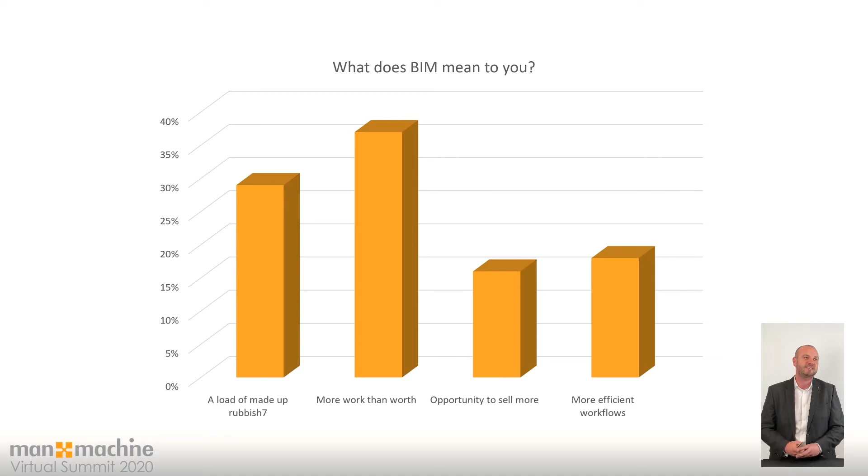Okay, well that was fascinating. We've got the results here. By the look of things, most of you went with it means more work than it's worth, which is quite interesting. In fact, most of you went for the more negative comments towards BIM than the positive ones, but that's very interesting. So we're going to be looking first of all at fundamentally what BIM is.

So the construction world, in my mind, is fundamentally different to the manufacturing world. Trust me, I know we've got both a manufacturing team and an architectural team here at Man & Machine, and they are fundamentally different types of people.

But traditionally, if you are making equipment that is used in the building of any description, you probably as manufacturers adapted your own processes internally probably 10, 20, 30 years ago in order to streamline your businesses. And you've probably been evolving that process through that time.

Now the issue with the construction world is they're only really just getting to grips with digital construction. Now the term BIM, or digital construction as they're preferring to call it these days, it's been around for a fair few years now, and any of you that sell to architects or MEP consultants or structural engineers or even the construction companies themselves...

you know that the requirement on you in terms of data exchange has changed quite a lot in recent years, from predominantly, I guess, a 2D exchange of data to a much more feature and data rich set of deliverables. It's taken the industry a little while to really get to grips with what that actually means.

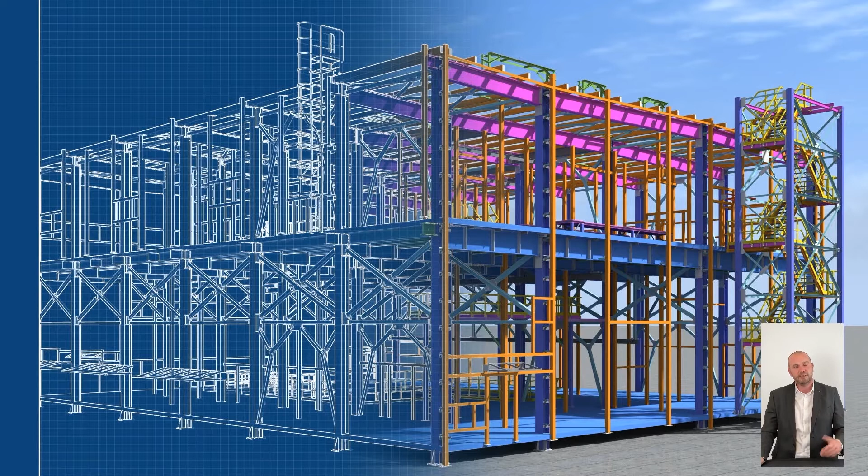This is something that we do quite often, and we can offer our advice. Now, the other thing to note here is that Autodesk products have evolved over recent years, and Robin's going to take you through some of that in a moment. But before he does, I just wanted to introduce you to an example of one of our customers.

So one of our customers is Storm King. Now, Storm King are the largest specialist manufacturer of off-site prefabricated components. When we started working with them a number of years ago, they were already having demands on them to supply LOD4 BIM models to their clients. Their clients typically are the home builders, and they supply prefabricated GRP products, these sorts of canopies over the front of doors, that you see in all sorts of housing estates all over the country.

There was quite a few different product sets, quite a few different products, you can imagine their projects were massive with lots of different content. They were actually considering buying Revit from us. They came to us to ask for Revit, and they wanted us to train an individual in-house to be able to use it, to redraw what they already had created in Inventor, but in a format that their customers needed.

Now, what we actually did was we worked with Storm King on a way to automate the creation of this BIM data, essentially using iLogic and all triggered within the Vault, so that their designers can concentrate on designing good products inside of Inventor. And when Vault gets to a certain stage in the process, it triggers an event to run iLogic, and it recreates the data in a neutral BIM format, pulling the IFC data, all the metadata from Vault, all into the same file in the right location.

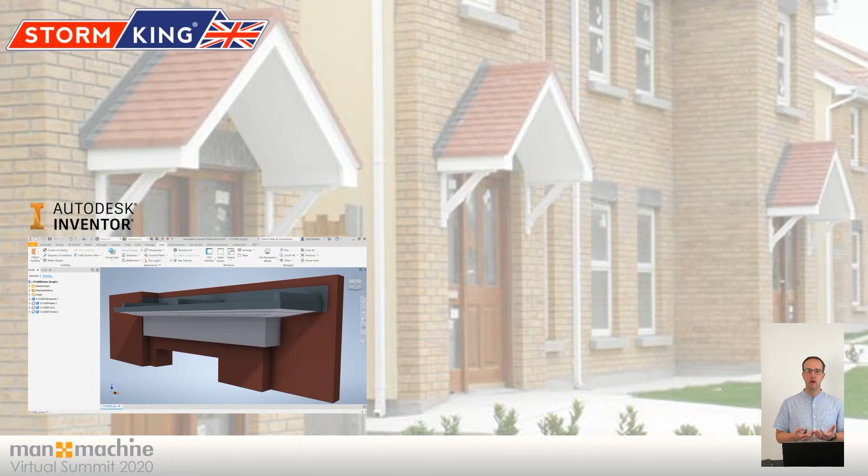So essentially what we're talking about is the fact that as a client, they're a heavy Autodesk Inventor user. And as you can see from the screenshot, a detailed model as you would expect. That model has assemblies, has parts, has fabrication drawings, and enough information there to go and manufacture these components out of GRP. But what they needed to do, as Simon's already alluded to, is produce Autodesk Revit friendly models.

So they were being asked specifically for BIM models. Now that's a little bit more than just a Revit model, as many of you will already know, in that we need to have a good level of detail in that model. I mean, we've got a fabrication model here, so we've got something that is fundamentally too detailed from a BIM perspective. There's just too much information on there from a geometry perspective.

So what we need to look at is extracting enough of that fabrication detail so that we can see a good representation visually, but also tie into the high level of information that we also have against that particular design.

Now, from a building information modeling perspective, the information really is master, and arguably more important than the actual geometry itself. Many times you will see inside a BIM model a very simplistic visualization of a component, even as far as a cube, sphere, or cylinder in some cases, and they are built on with a higher level of information that explains what that component is, what it's used for, defining it in a lot more detail than what can be seen visually, and that's more important.

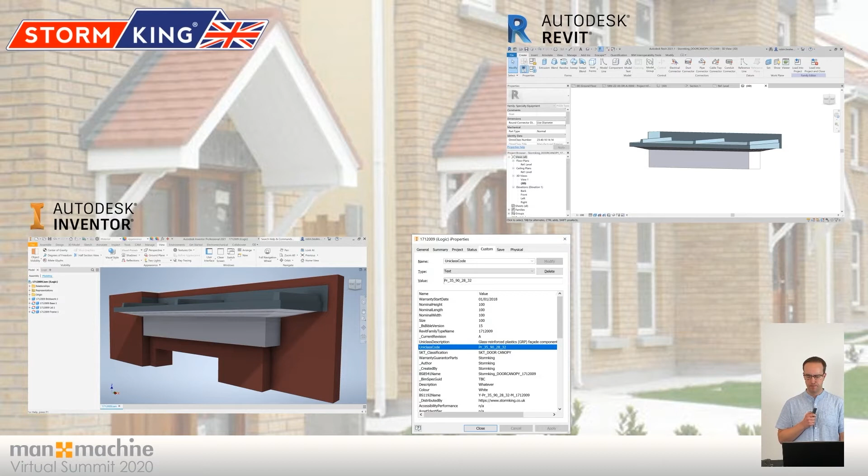So if we could simply take that detailed fabrication design and simplify it, perhaps through the use of shrink wrap, attach all of that metadata to get a BIM content export, then we have the ability to create a Revit family file, an IFC file, or an ADSK component file almost at a press of a button. But we didn't want that to be at a press of a button for Storm King in this case. We didn't want the designer to have to remember to go through that BIM content process inside of Inventor.

They already had a very sophisticated Vault setup with custom API, with the ability to drive information directly from ERP or other systems within the business. So why would we not look at leveraging that integration with some further custom code, custom development, to automate this entire process end to end?

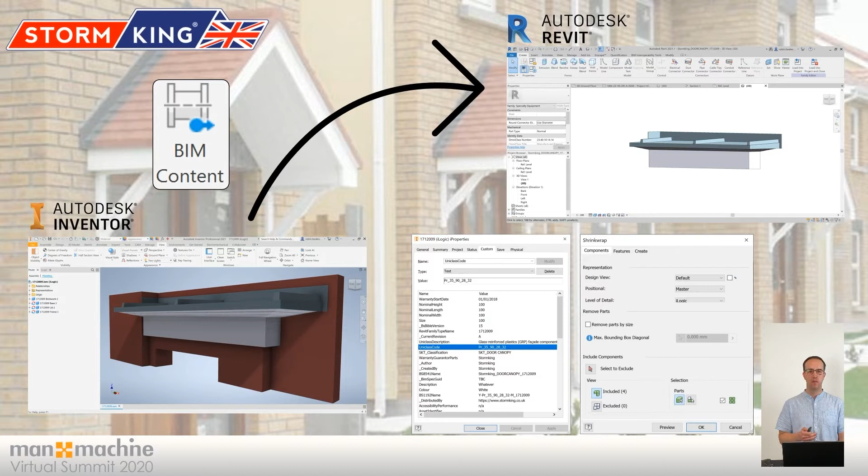So, for example, as part of a workflow or a life cycle inside of that Autodesk Vault system, perhaps when a file gets sent to be released, or set to customer approved, whatever it might be, or even shared with customer, Vault kicks off a custom workflow using Cool Orange Power Jobs, for example, and maybe some clever custom scripting using Windows PowerShell to go and automate the BIM content creation procedure inside of Inventor. That's the process I want to share with you very briefly before we move on.

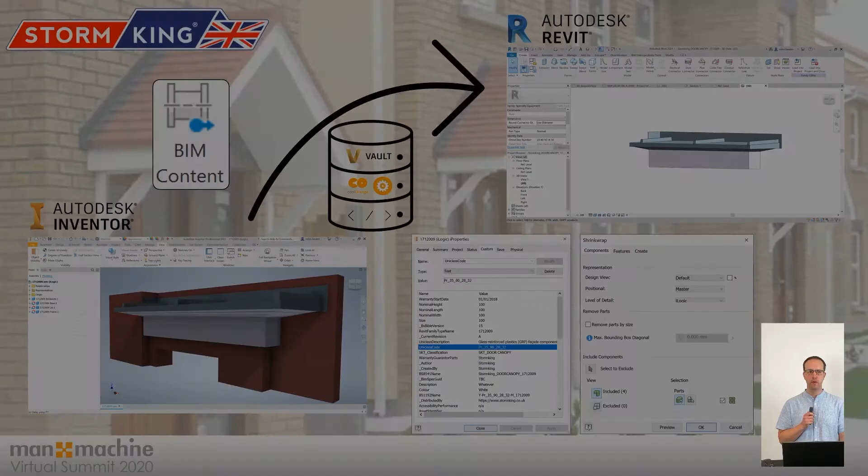So inside of Storm King's Vault, we can see that in this case I kick it off manually, but by selecting an IDW, we have some custom API integration that shows me if BIM files are there. They show me BIM properties that are defined within the file, and they allow me to choose whether something should or shouldn't be included as part of the BIM export.

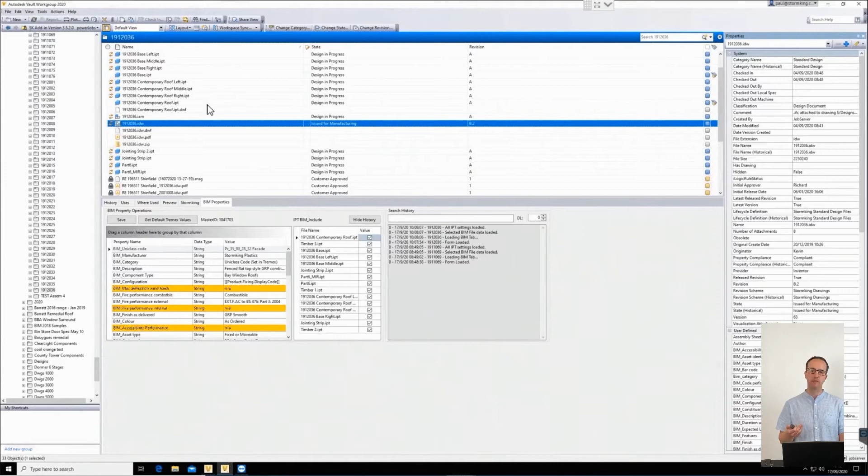Now in this particular example, we chose to generate these files manually because we didn't actually want to go through and kick off a workflow on this particular live design file. But what you can see happens is it kicks off a job inside of Job Processor.

And if I just give this a couple of seconds, what this does is it will automatically go ahead and create a shrink wrap. So it simplifies that main assembly file, and that is closely followed by both a Revit file, RFA family, an IFC Industry Foundation Class file, and an ADSK file.

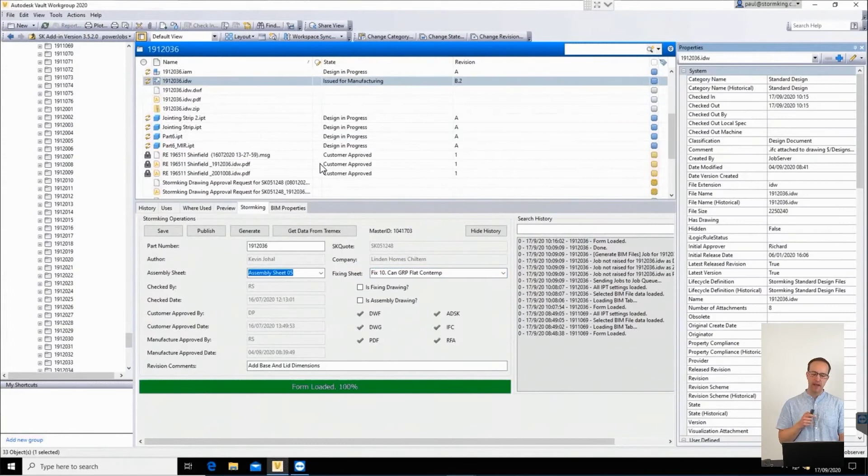And once they're created, they are checked back in and up-revved, up-versioned as necessary into their Autodesk Vault system, all automatically based on those series of automated rules.

That process means that they can just carry on with their design work and pushing their life cycles through Autodesk Vault, and it will automatically create BIM content when they need it. It will appear in Vault. They can then share it with the customer as necessary.

That's a great workflow for me, and it's things like that that we really strive to help our customers with. Not just solving a problem, but actually embedding it with an existing solution and some existing workflows, which means that they haven't got to go through a change management process. They've got something that's embedded with the way that they work, which from my perspective is great.

I want to share how Inventor as a product has really matured in BIM interoperability over the last year or so, specifically with its AnyCAD functionality. AnyCAD has been inside Autodesk Inventor for a number of years, offering interoperability with CATIA, SolidWorks, step files, and other products outside the Autodesk ecosystem, as well as Fusion 360, AutoCAD, older Inventor files, and now Autodesk Revit has had an upgrade in that AnyCAD functionality.

We've been able to bring Revit files into Inventor for a number of years, and it's always worked pretty well. But with 2021, we now have the ability to drive some nice interoperability between Inventor and Revit, which I'm going to show you in a few moments.

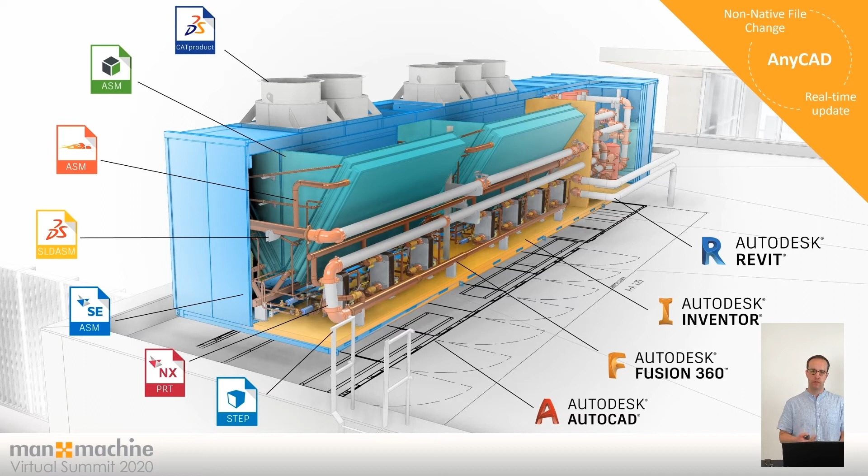So what I'm going to show you is a workflow between Inventor and Revit. Simple as that. But the bigger picture is actually a much wider workflow, one that can communicate all the way from Revit to Inventor via BIM 360 docs and Autodesk Vault. Autodesk Vault and BIM 360 docs have been able to talk to each other for a number of years now.

We're limited on time today with this virtual session, so just think about the story behind what you're seeing. Whilst you're just seeing Inventor to Revit interoperability, imagine that as a manufacturing designer, you're checking in and out of Autodesk Vault. In the background, that Vault could be downloading the latest architectural file from BIM 360 and putting it live, ready for you to link inside Autodesk Inventor.

It might be that you want to share your latest Inventor design, or share an IFC file from that design, to the architect or specialist designer. All you have to do is check it into Vault, change the status, and that could be automatically synchronized up to BIM 360 so the architect, specialist designer, or contractor has instant access as soon as it's readily available.

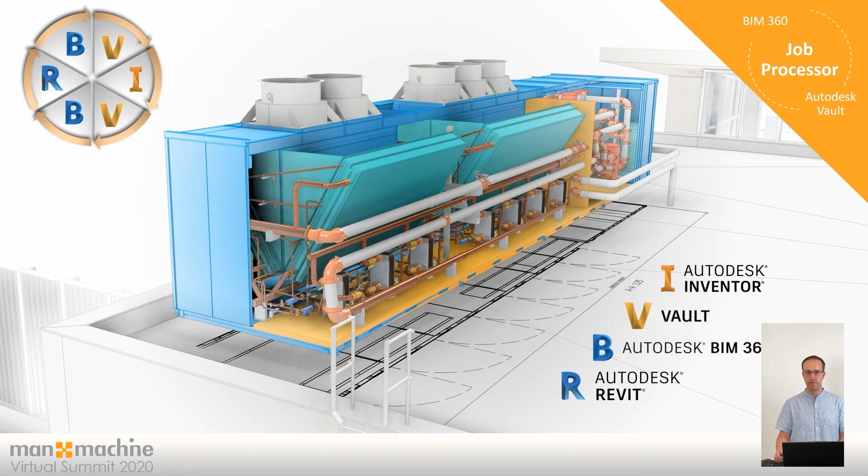Okay, so we've just jumped into Revit 2021, specifically point one in this demo. The first thing I want to do is explain the difference between a Revit family and a Revit project, because that's important for you to understand throughout this short demonstration.

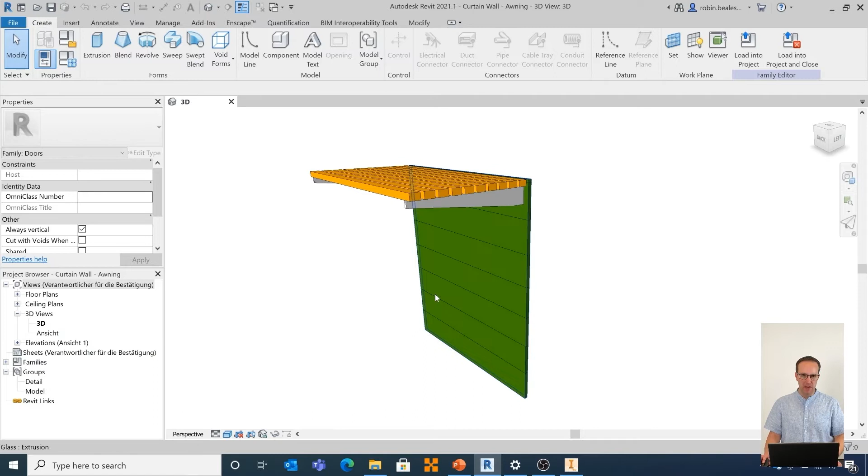We're going to start off with a Revit family file. From our perspective this is kind of an assembly, if you like, though you could argue it's a part since it doesn't quite have the intelligence to know there's a BOM in there. But we have different components or features, so in this case some extrusions and maybe some lofts in there. But there's no fabrication detail.

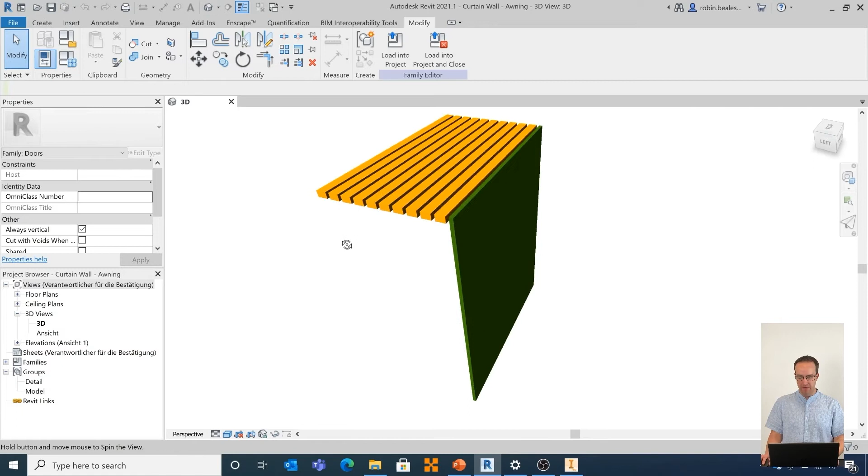You don't get that understanding of how many components, and how many iterations or instances of those components, are there. But what we do have is a good level of information against those, a good property level or understanding of that property level inside of Revit.

Now those Revit families, RFA files, are typically placed into an RVT file, which is a Revit project. Those Revit projects are typically much bigger than an individual component, so an entire building, for example, whether that's an architectural design, a mechanical, electrical, plumbing design, or a structural design.

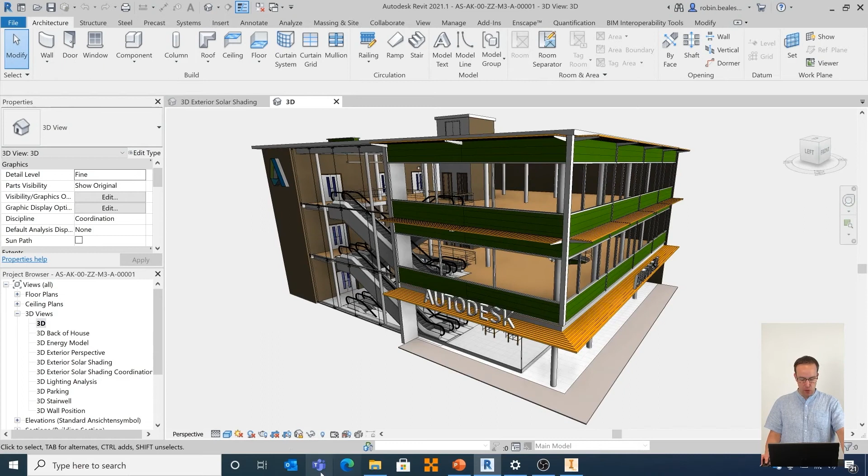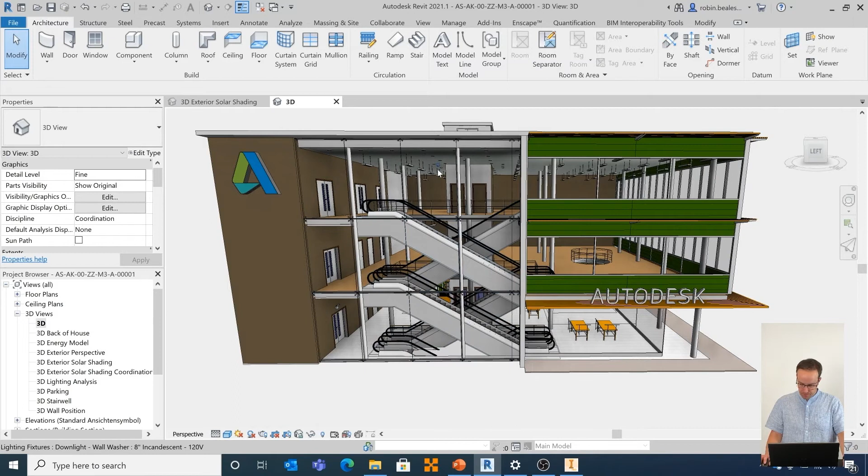Revit supports all of those. In this case, we're looking at a simple architectural design of a building. If I jump into my main 3D view, we can see that we've got a fairly detailed model. It's not to the nth degree detailed, but we've got a nice looking model with exterior building components, walls, windows, doors, some facade elements, curtain walling, panels, escalators, slabs, lighting, and columns. So we have a building.

Now, because we don't need that breadth of information in Inventor for what we're going to do today, I've just created a simple view called 3D Exterior Solar Shading in Revit, with a filter on there to turn off the stuff that I don't need in Inventor. So I've created a filtered view in Revit that I'm going to use to import into Inventor.

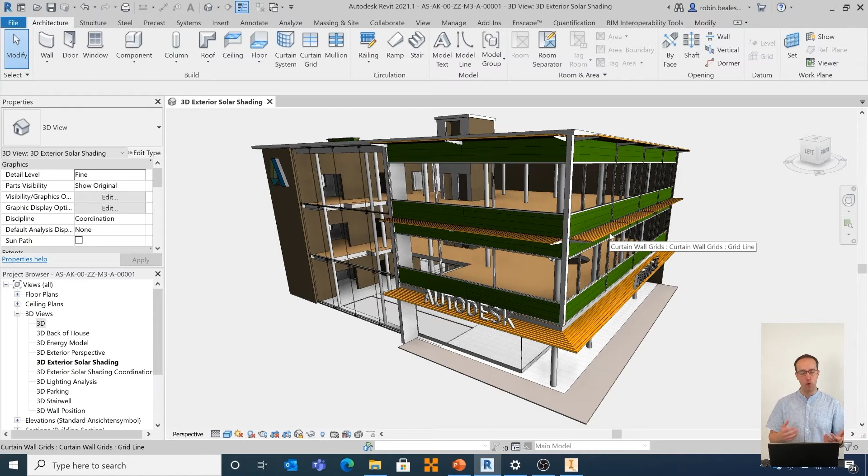Maybe the spec of this particular project is that we want to create the facade that the architect has laid out. So we've got those Revit families we saw, placed around this building. What I want to do is import that into Inventor, reuse that initial thought or design, and then develop it into something that can be manufactured, that we can fabricate and put together, and deliver the right size, shape, and fitting to go on that building.

So I'm just going to leave Revit open, jump into Inventor, and go through a couple of processes first. Majority of you on this session are Inventor users in some way, shape or form. Just to reiterate one thing we went through earlier, what I have in Inventor is intelligent component design.

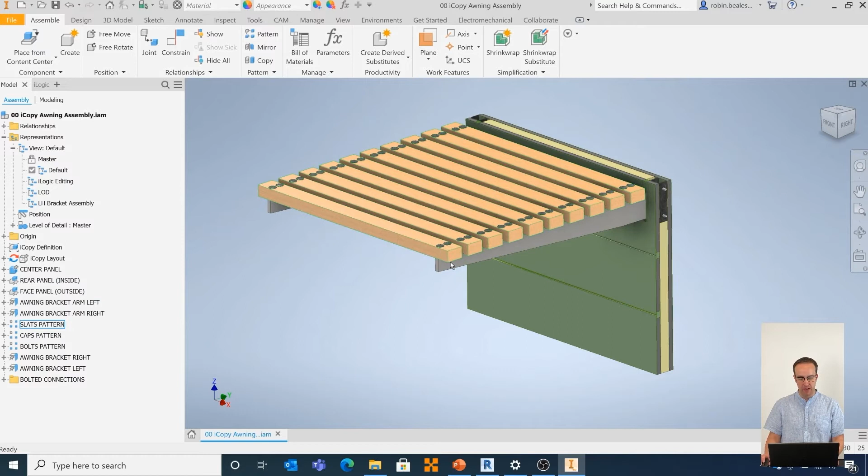If I look at the same facade that we just saw inside of Revit, we have something far more detailed. We've still got the slats on the top, but those slats are fastened to these sheet metal brackets, which are in turn fixed to the main material on the facade with some fasteners. We have insulation material in there, and typically something that is a lot more detailed and manufacturable from that perspective.

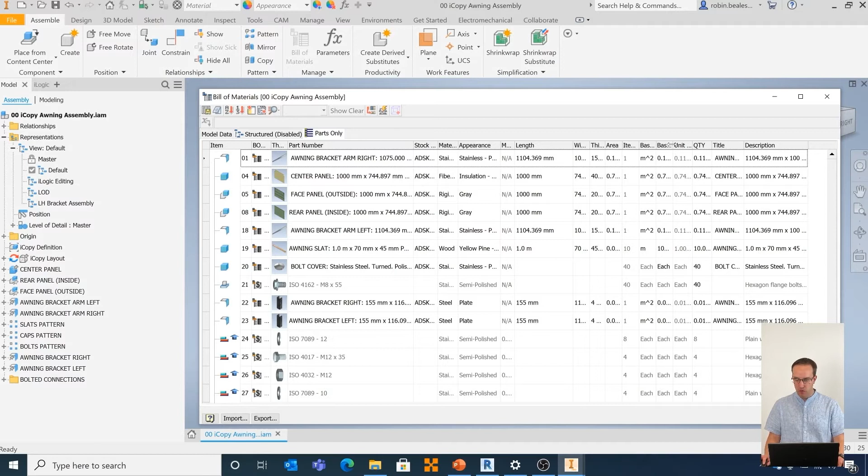In Revit we had a very simple component with a few extrusions, and in Inventor here we have 130 different components, 25 of which are unique, which means I have a fabrication bill of materials I can look at from a model data perspective or parts information, showing me lengths, widths, base quantities, areas, different materials, and so on.

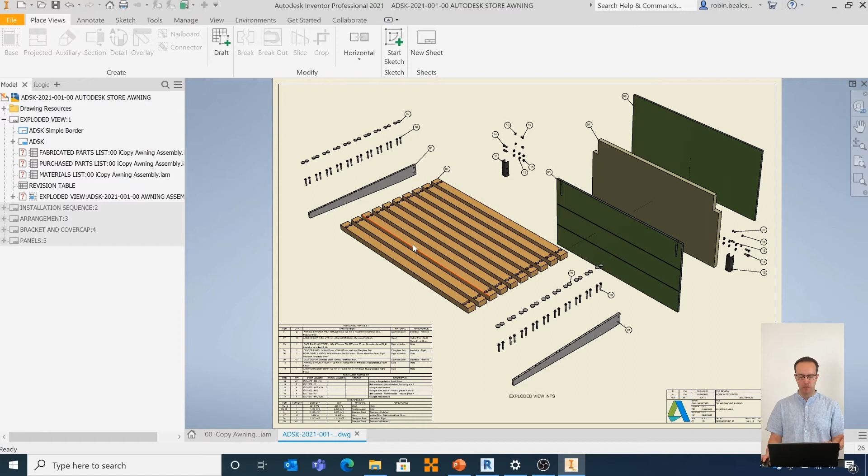It also means that for every single one of these components, I have a drawing, whether that's an IDW or a DWG, something that is updated live from those assembly files or part files. So whether it's a GA like this with an exploded view and a parts list, or a specific view of one of these individual components, I have a fabrication model, a manufacturer's model, with the different drawings and GAs that link with it.

And to remind you from the sessions we had this morning, we also have things like iLogic. I'm not going to go through all of this again - if you missed the session on iLogic this morning, be sure to go catch up on our YouTube channel. The joys of live demos.

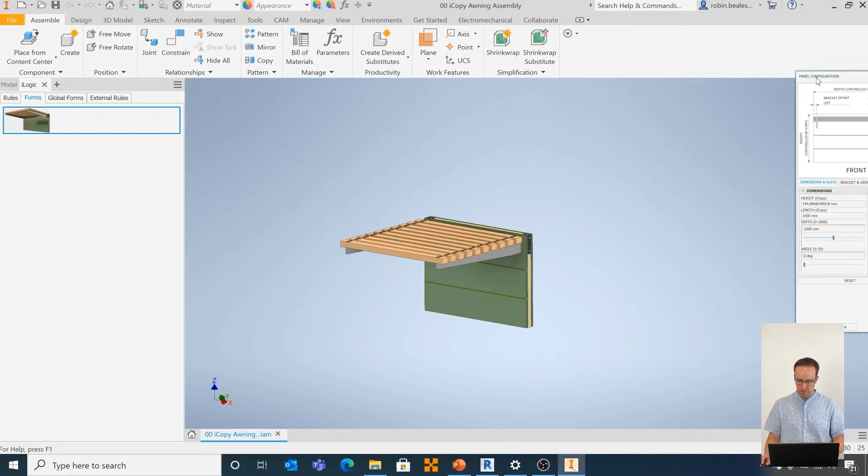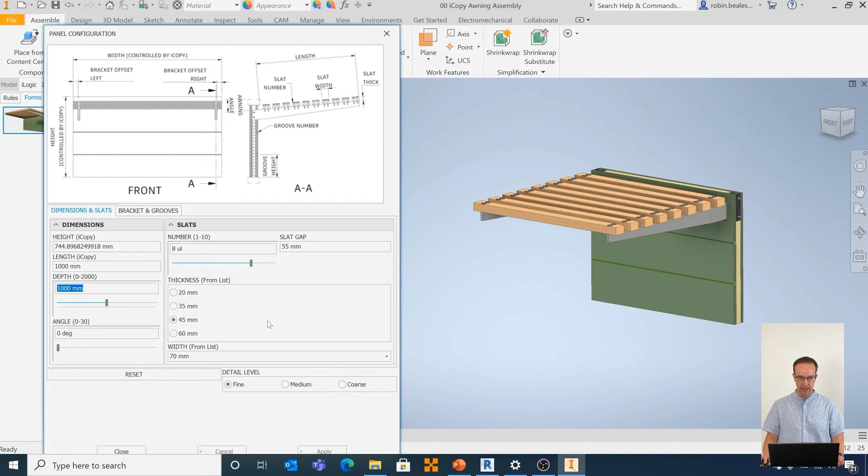But as you saw earlier this morning, with this particular component we've got an iLogic form, so we can come in and change the number of slats. We can change the height, change the width, and the model updates for you automatically. I'm not going to go through that in the same detail as this morning, but essentially we've taken that spec from the customer and detailed it, defined it, and got something we're now ready to put on the side of the building and start collaborating with that architect. And that's what I'm going to do now.

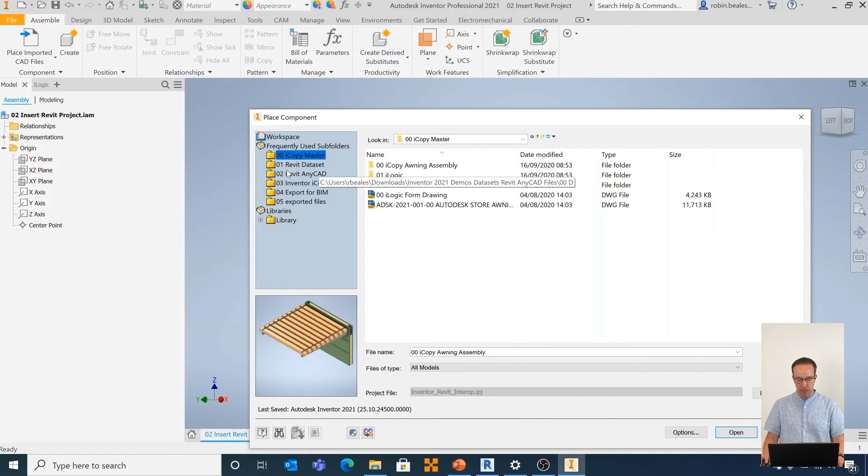I'm going to open up a blank assembly template ready to receive that Revit file. I'll jump to the drop down and say I want to place a CAD file, specifically AnyCAD component. From there, I'm given a whole raft of different options, but I'll use my frequently used subfolders to jump to my Revit dataset and choose to import this Revit file. I'll say open.

It would take a couple of seconds the first time, and depending on how big that Revit file is, it might take a little longer or a little less time to load. I'm running on a pretty good spec laptop, so it loads pretty quickly, but it's not the biggest or most complex file in the world.

When importing, we can choose to import as a reference, which keeps a live link between the Revit file and the Inventor file we'll use today. It's fantastic, but you might not want that—maybe you want a nail in the ground at the point you downloaded it, so you'd choose to convert the model instead. In this case, let's reference it.

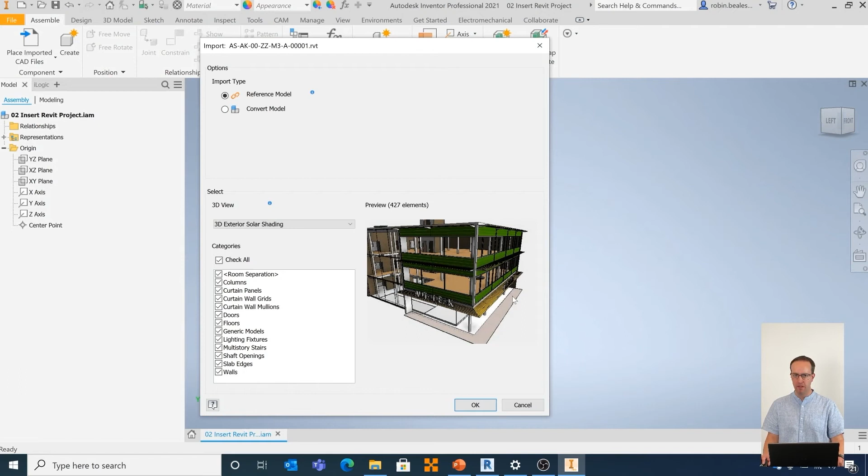Let's use that 3D view we built in Revit, the 3D exterior solar shading view. I'm going to be lazy and just import everything. You could be selective if you wanted, but we created that filtered view in Revit to save us doing that again in Inventor. If that wasn't the case, we could filter down to just the elements we want to see. I'll press OK.

Inventor gives a little warning that you're importing a whole Revit project, and it might take some time since it could be quite detailed. In this case, I've got a high spec machine, and the model isn't massive, so I'm just going to import it all in.

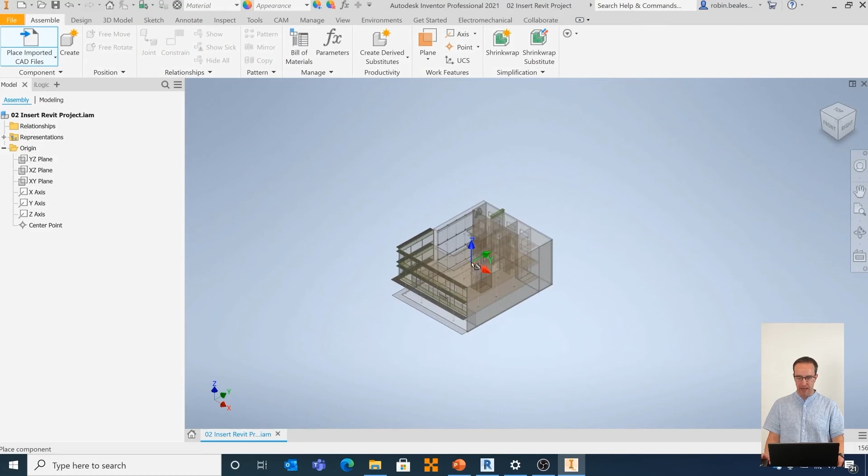I'm going to right click and place it grounded at origin, just to make sure the 0,0 of the RVT Revit file is at the 0,0 origin point in Inventor, ensuring those coordination points are in sync between both Inventor and Revit. That's important for any cross collaboration to work moving forward.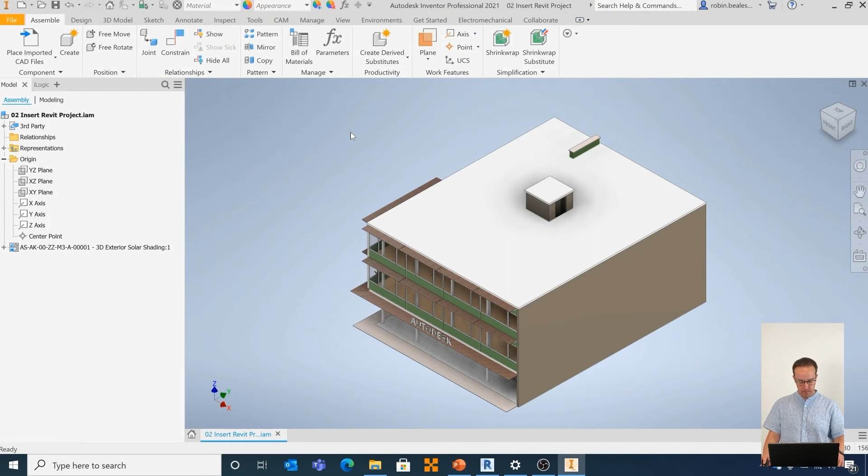What you get straight out the gate is a really nice visual representation of that building. For years we've had interoperability between materials, whether it's Inventor to Max, AutoCAD to Inventor, or Revit to Inventor. Materials look and feel the same between applications, which means I can bring this straight in and it looks the part, just as it did in Revit, so I can instantly see what's going on. First and foremost, we have great visual fidelity here.

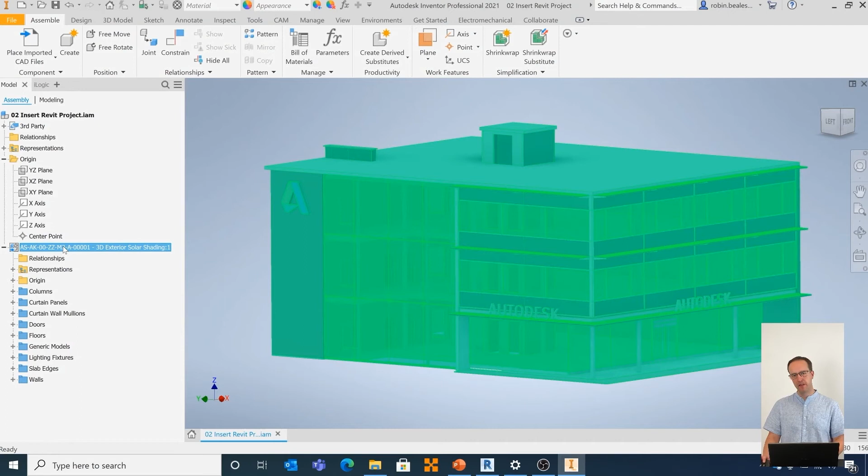The second thing we can do is jump over and look at the model browser. Nowadays in Inventor, the import from Revit is far more intelligent—before you'd just get a load of solids, but now you can see different classifications of components. We've got a folder for columns; if I select the folder, it selects all the columns in the design. If I go into the columns folder, it shows we have two types of round column, and we can individually select those groups or individual components.

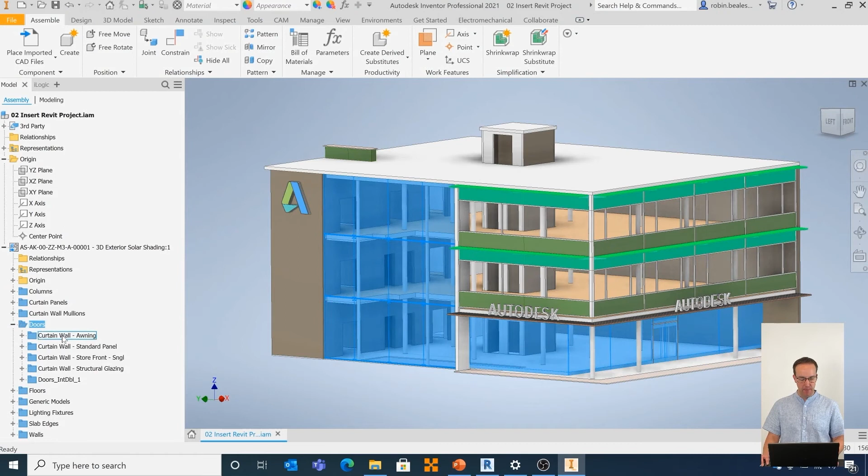You can use all the benefit that comes with Inventor at that point by grabbing one individual instance. I could right click that and say I want to find it in my window, should I want to. So you get all the functionality you'd expect once you've brought that in and imported it.

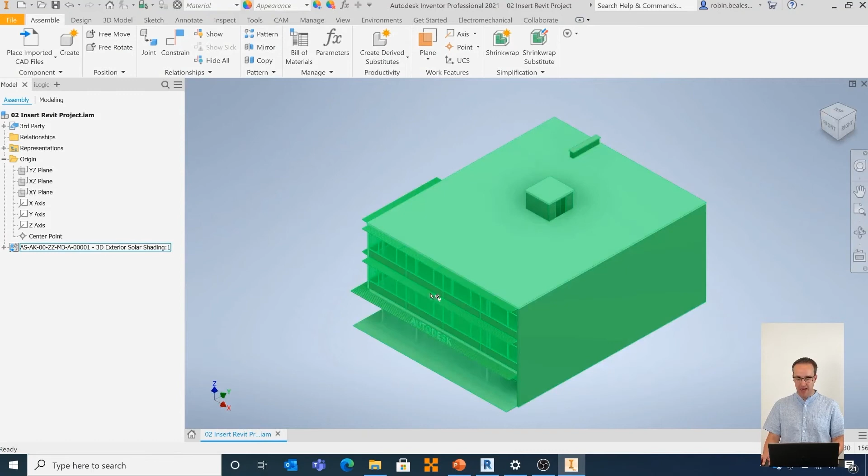Now, what we want to do with this particular design is take that initial idea, that concept design the architect's done, and as I've said, we want to embellish it and detail it. We've already got that fabrication model, and from this morning's session and just now, you've seen that it's a parametric model—so it can resize and chop and change to suit.

So what would be great is if we can come in and use some, in my opinion, hugely underused and underrated Inventor functionality with iCopy to take what exists and match it to the requirements of this building. I'm going to do a little bit of Blue Peter just to save time to make sure we don't run over, because we've got a tight schedule today.

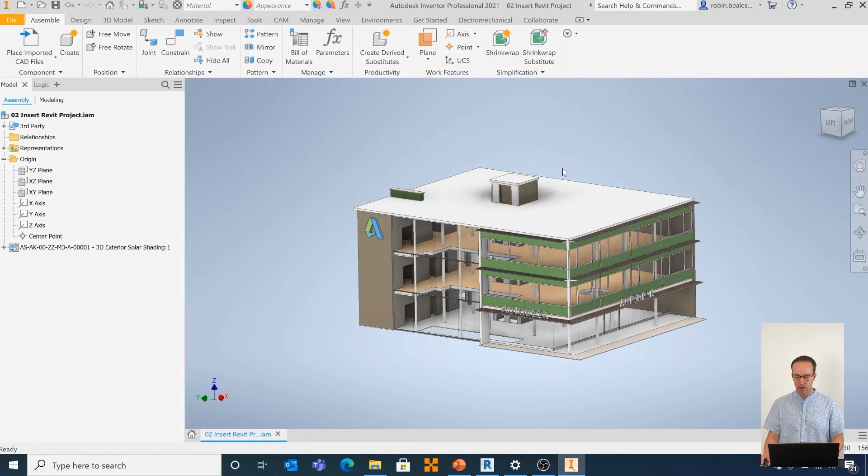I'm going to replace all of these facade elements with Inventor versions, ready to then push this back out to Revit. I'm just going to close it down for the purpose of this and open up one that's ready to go. Let's open up this particular assembly here, and give it an update just to make sure it's running the most up-to-date version. Just going to take a few seconds.

With iCopy, I've put a little bit of pre-intelligence in here to basically add some work points. For those of you that haven't used iCopy before, what it's going to do is allow you to place a component, intelligently copy it and scale it up or down, resize it bigger or smaller, or even follow an existing pattern to give me something that's a lot easier to work with.

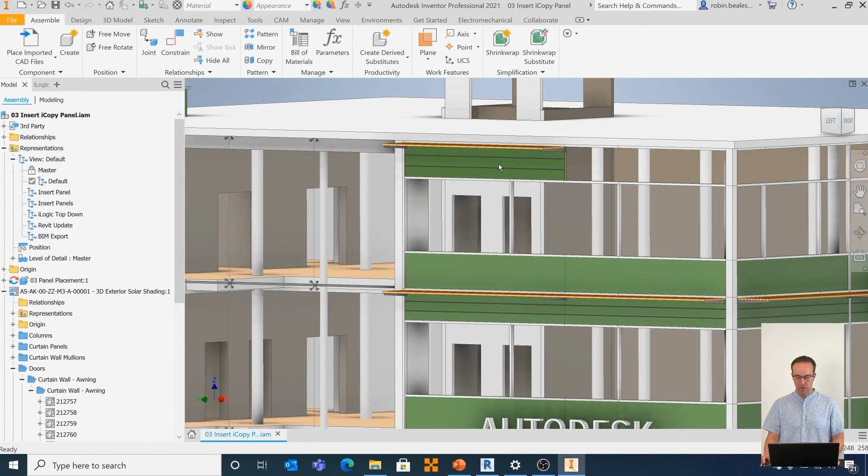In this case, you can see that I've placed one detailed version of my facade just here, but I've got a number of areas where I need to go ahead and place another one. So first things first, inside of here, I'm just going to come to Insert Panel just to have a saved view here.

And you can see that we've got this panel on the left. This has been placed as a single panel. If you remember from a moment ago when I opened the panel, it was quite small. And certainly this panel here is much bigger on this west facade.

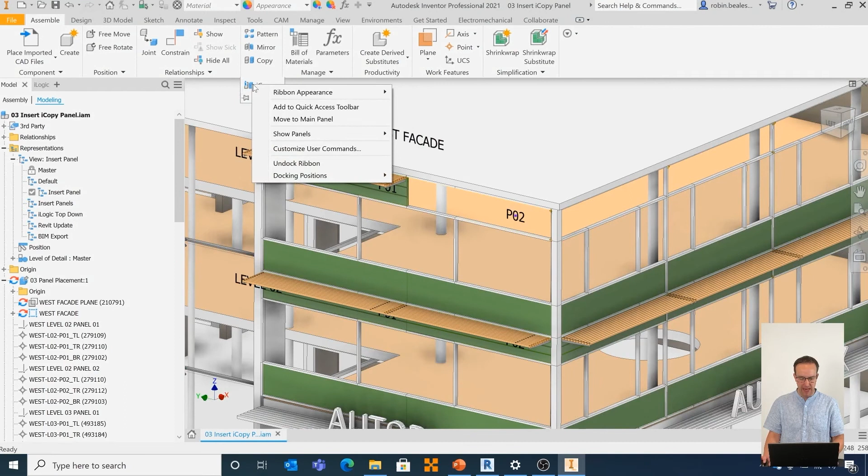So what I'm going to do is say up on my ribbon, I want to choose iCopy. And if, like me, you're not used to seeing it underneath this pattern drop-down, I used to have it up here on the ribbon. You can just right click any component or any tool and say you want to move that to the main panel to unhide it, so it's more obvious. Tools like this, in my opinion, shouldn't be hidden because they're so useful.

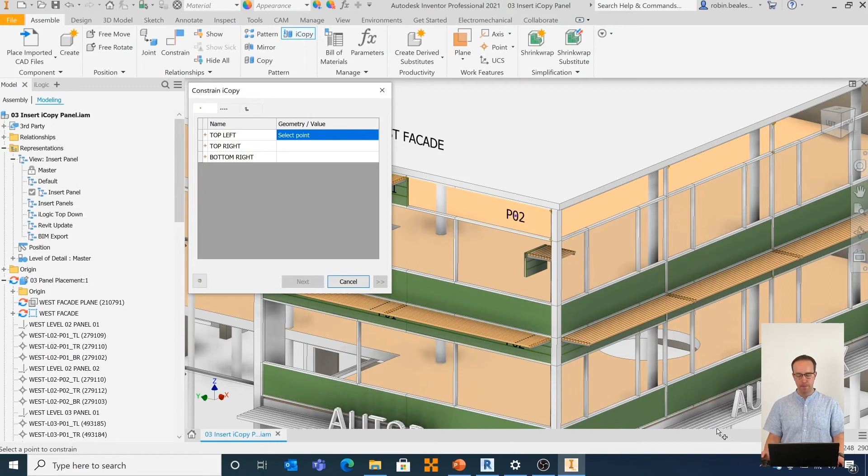If I go ahead and choose iCopy, I'm going to go and choose that master data set that I first opened, which is just that parametric panel, and choose Open. What that'll do is bring that short facade, or small facade if you like, into the model ready to place. But it's going to give me a constrained iCopy, so it's giving me 3 options to place that component in my model.

Now, this is because inside of that iCopy component, I've got 3 work points: one at the top left, one at the top right, and one at the bottom right. That allows me to then scale that component up or down. So taking a standard component and just adding 3 points that parametrically size that component makes a big difference when you're working on files like this.

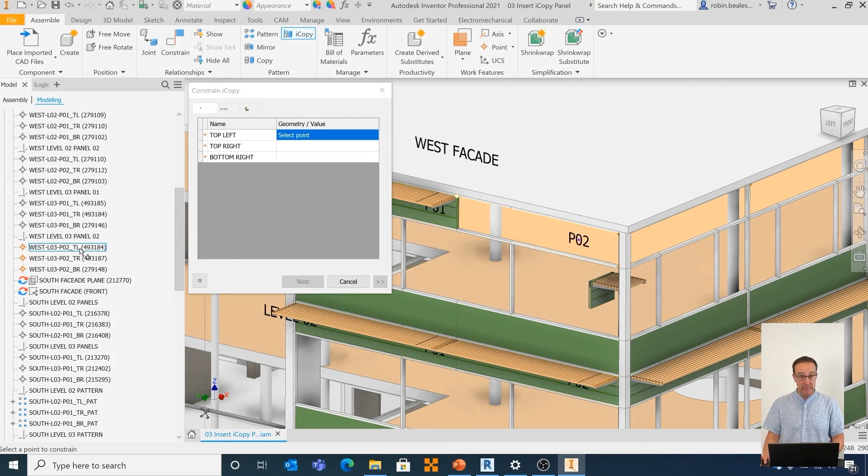So all I'm going to do is just scroll down and show you that I've got in here - if I hover over them, just some points that are pre-set up. So all I've done is just place points in the right place in the file. And I'm just going to say the top left is my top left, the top right is the top right, and the bottom right is the bottom right. And what you'll see is that component is now parametrically resized to suit.

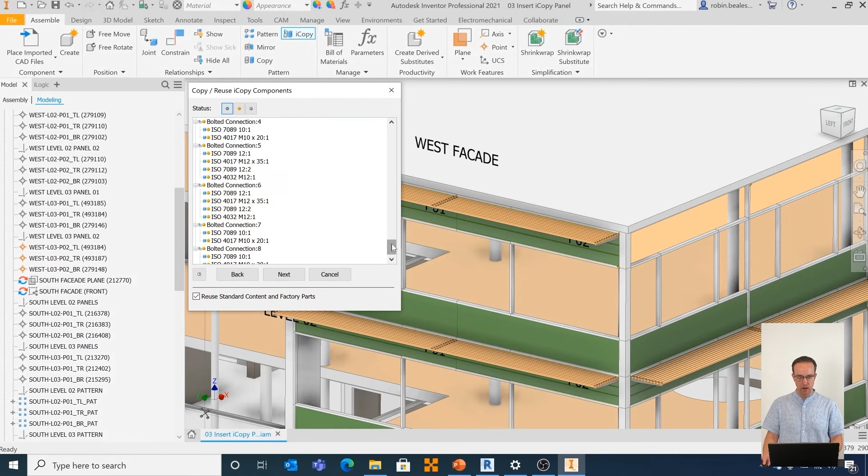I'm going to press Next. As part of that, it's going to ask me what I would like to do - it's a copy reuse dialog box. Do you want to copy the selected object or do you want to reuse? Well, typically I want to copy it because I've made it bigger - that panel is likely not going to be the exact same size as the previous one, so I want to have a separate version of the panel. I'm going to leave it on copy, but reuse any standard parts.

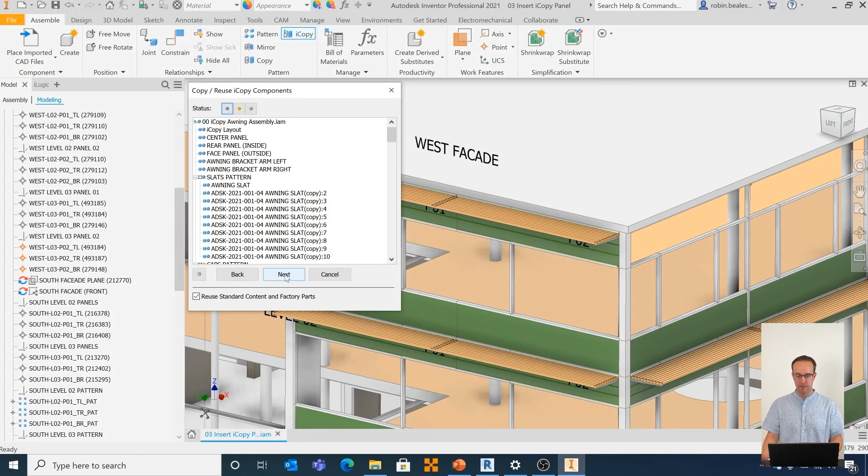Hit Next. I'm more than happy with the names, but if you specifically wanted to name these, you could. I'm just going to say OK. Give it a couple of seconds. It will put that component in, place it into the assembly, update the BOM, and resize everything to suit.

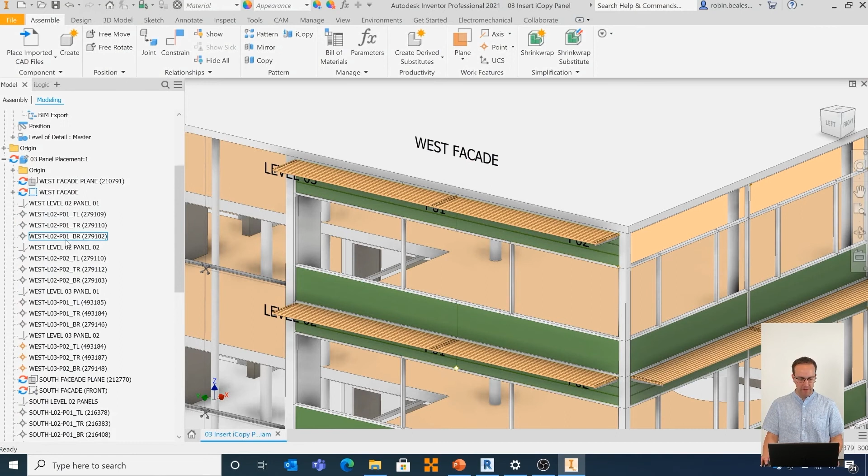So I now have a facade that's sized specifically for that curtain panel. I'm going to do exactly the same thing again with a slightly different process. If I go into this Insert Panels view, I've got a further 4 panels that I want to place, but this time I'm going to do that with a pattern.

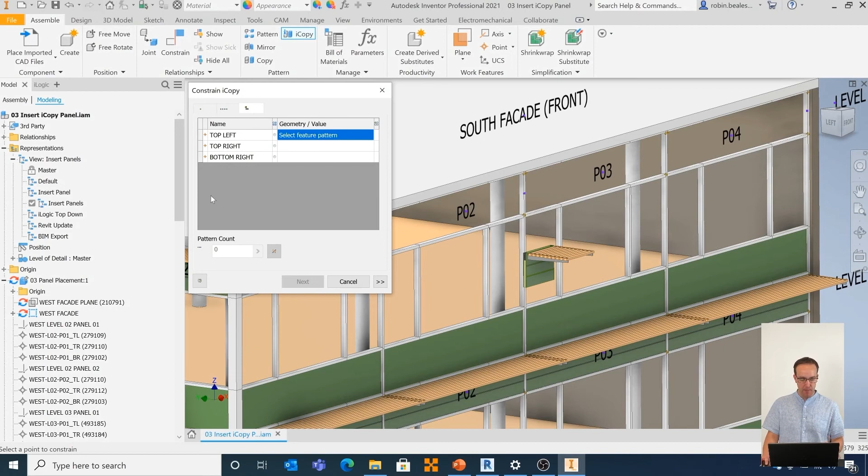So the same thing again, I'm going to choose iCopy, choose the same assembly, and open it up. But on that particular component, rather than placing a constrained copy, I'm going to say Pattern. Against that pattern, I want to pick my work points on my south elevation - I've placed those same 3 work points in my assembly, ready to receive data. Then I'm saying top left is my top left, top right is the top right, and bottom right is the bottom right.

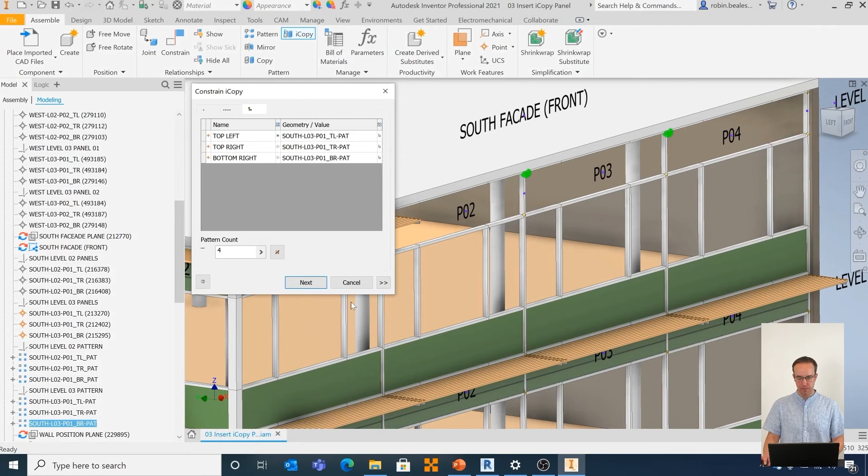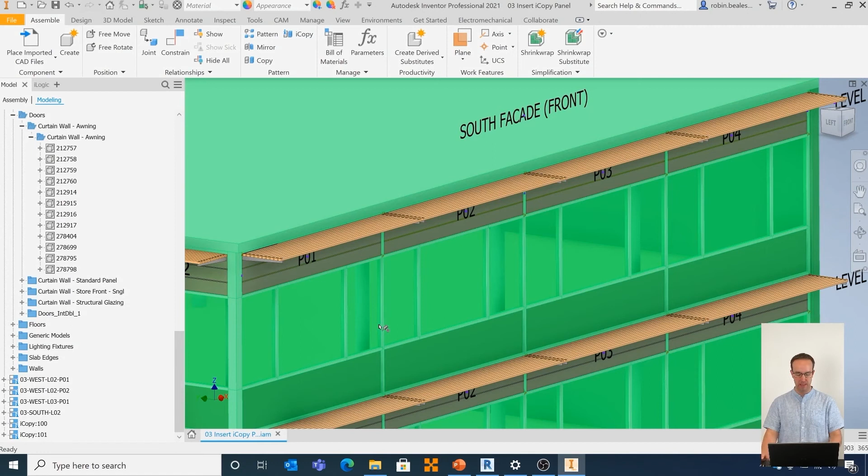You'll see that in the background, behind this dialog box, it's placed one instance of that facade panel, but for the others it's highlighted the work points. If I hit next, again choose to copy the data, name them as I'd like, and press OK - this time it's going to place, resize, place, resize, based on the pattern of work points. So I'm putting a bit more time into the initial design to place work points, but I get something that's far easier to work with. It automatically scales them up, which is absolutely fantastic.

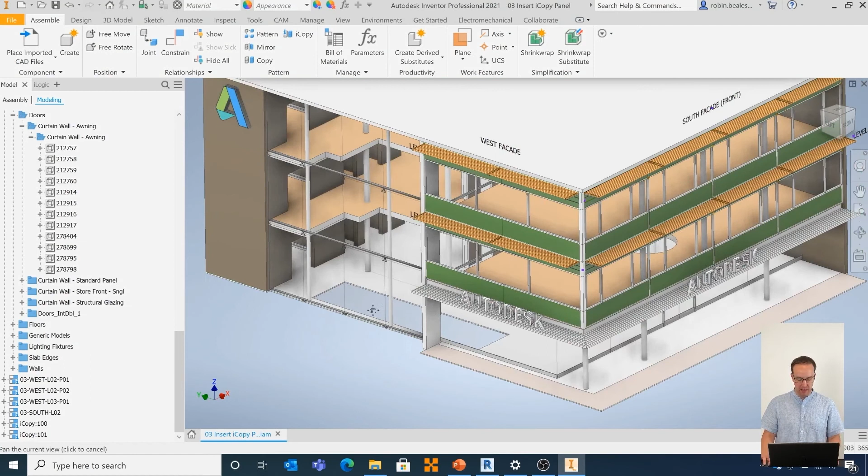Now we've got huge benefits here. Rather than saving, which would take time based on all the different iCopies I've done, I'm just going to close this down.

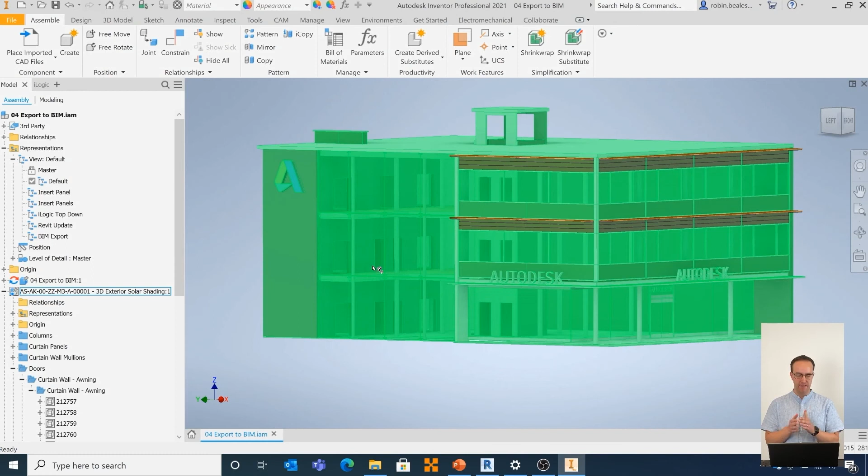I'm going to open up one that's at the exact same point - let's open up this export to BIM here, just to show you, in my opinion, the best part of this. iCopy is great, it's been around for years in Inventor, and I love it. But actually, for me, this next part is key, because it allows you to have a succinct link between Revit and Inventor.

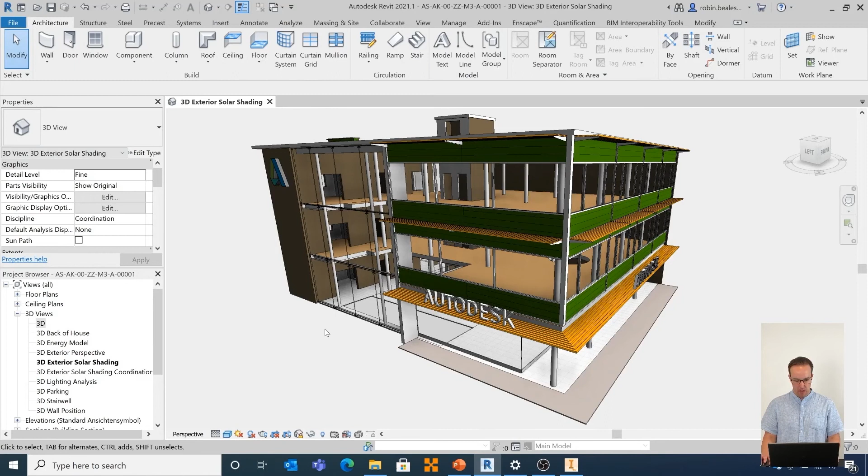I've got a dimension here. So let's go into a Revit update - I've got this wall-to-wall 11-meter dimension. I'm just going to jump into Revit, note here the update icon, jump back into Revit and go to a saved view. I'm going to select this wall here, and with it selected, say activate dimensions, which shows me that I've got a dimension.

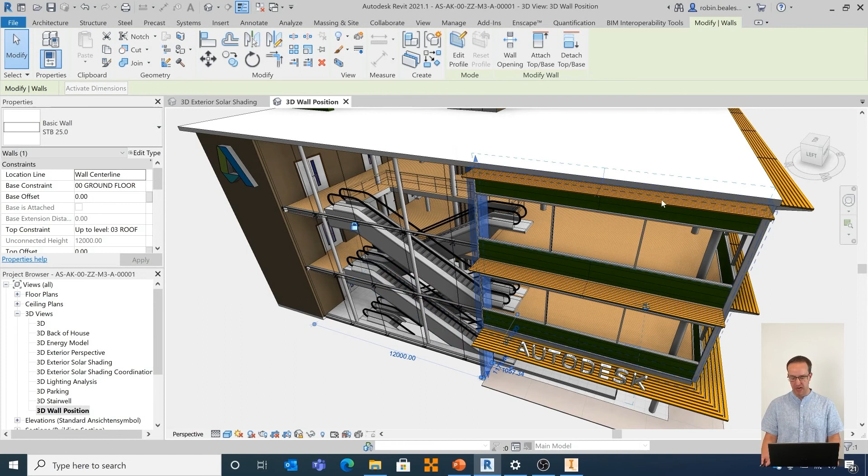Now in Inventor, that dimension was linked to the end of this wall, so I'm going to do the same thing, but then change that dimension to 12 meters, which is obviously a bit of a design change. We've already said architects like to change their mind on things, which is fine. But based on that, all of these facades change, based on the curtain pattern in the background.

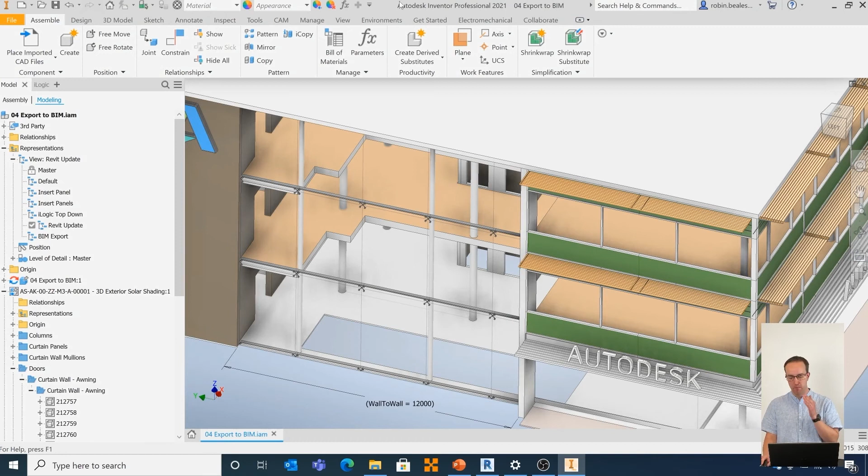If I save this file in Revit now and go back to Inventor, you'll see it's prompting for an update, which is exciting, because if I press update it takes a couple of seconds to read the changes from my RVT file and pull those back into Inventor. Not only will they make changes to the Revit geometry, but because of the way I've modeled my facades, it will update the facades as well.

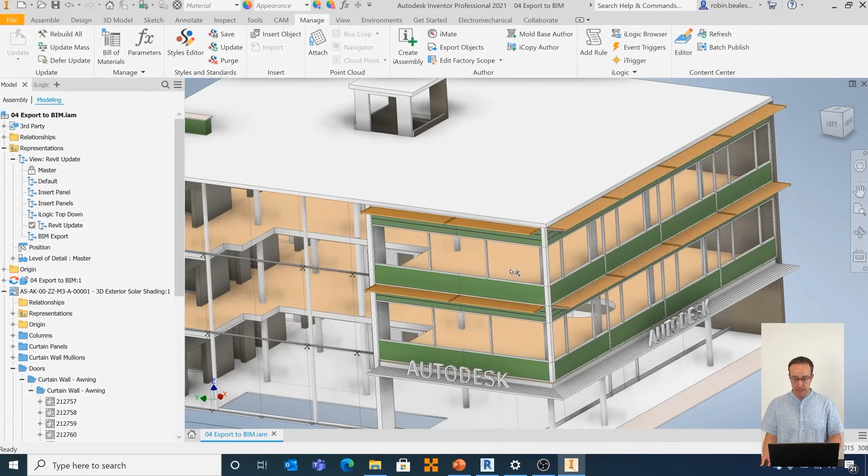All I need to do is a little rebuild all. You'll notice the fasteners haven't moved here, so I'm going to go to manage and hit rebuild all, just to get it to reposition those fasteners based on the iLogic rules I've got in the background. But what we have there is a live link and a live update between a changed Revit model and the Inventor model, which for me is fantastic - that's something that, for anyone in this field, is second to none.

What we can do now is export that out to Revit, and we've got a couple of different options. I'm not going to go through them in the nth degree because, again, we just don't have time today.

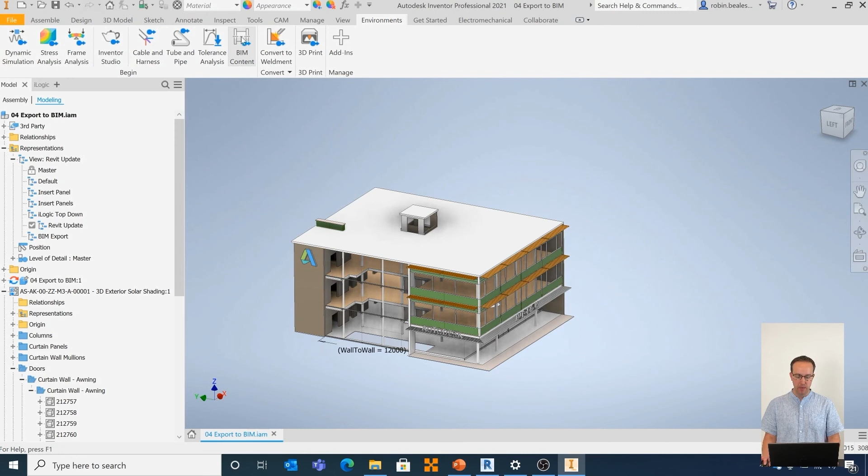But once you get to a point where you are happy with that component, we have the ability to push it out. If I go to environments, we've got a BIM content option here. Now, I don't want to send this Revit building, so I've got a view rep, which is just my facades.

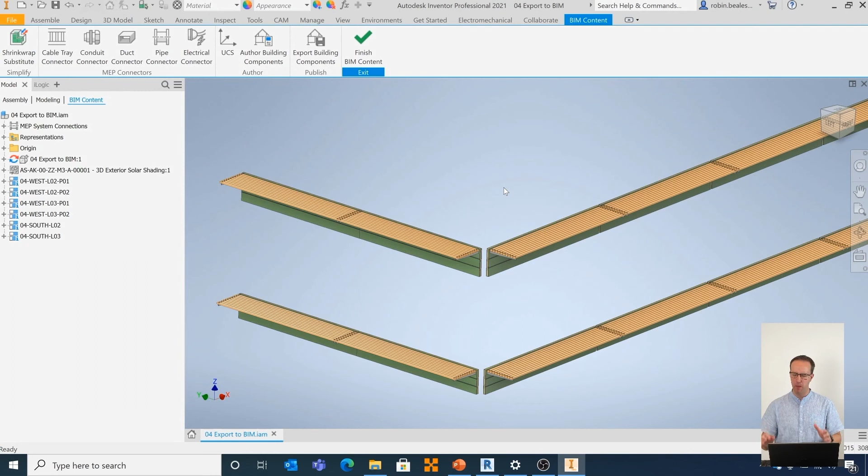Everything else is turned off, and I can go ahead and say export BIM content. Now, in this example, we've actively taken part in more than just a single component design. We're taking part in the actual shape and build up of that building. So I wouldn't export a Revit family for this. I'd actually go out as something like an IFC, so it's coordinated correctly with the building. If I just had a single panel, then I'd go out as an RFA, but it's more than that, it's bigger than that.

So in Inventor, what we would do is we would take the panel, we would go into author building components, we would select some options in here, such as the Omniclass number. We don't really use Omniclass in the UK, we use Uniclass. Inventor at the moment only supports Omniclass, which is a shame from my perspective, but it's quite easy to create a mapping there if you know the two systems well.

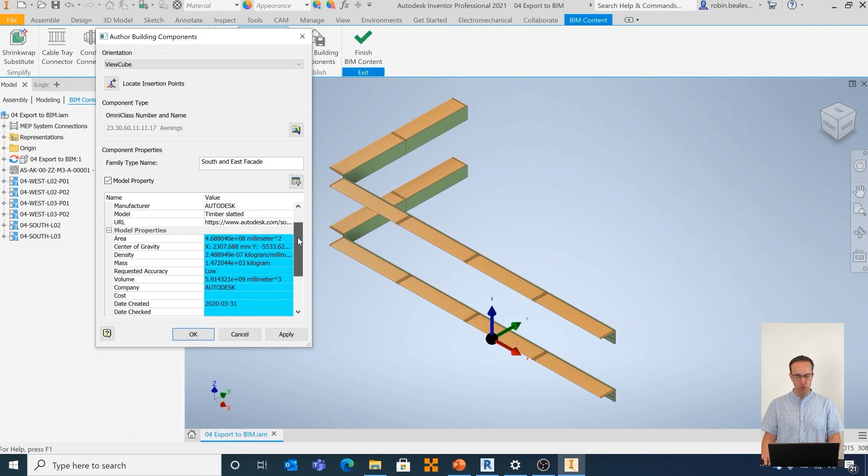So we can create a classification, we can choose whether or not to export model data with that, should we want to. And then from there, we can go ahead and export our building components. We can export them out to an IFC, and we can hit save. The IFC format writing out takes a little bit of time, so rather than you watching a progress bar...

I'm just going to go over into Autodesk Revit and just show you that from inside of Revit, we could say manage, insert, manage links, and you can see that under IFC, I can add an IFC file. From there, I could say exported file and go and grab the IFC file that's been put together inside of Inventor and open that up inside of Revit.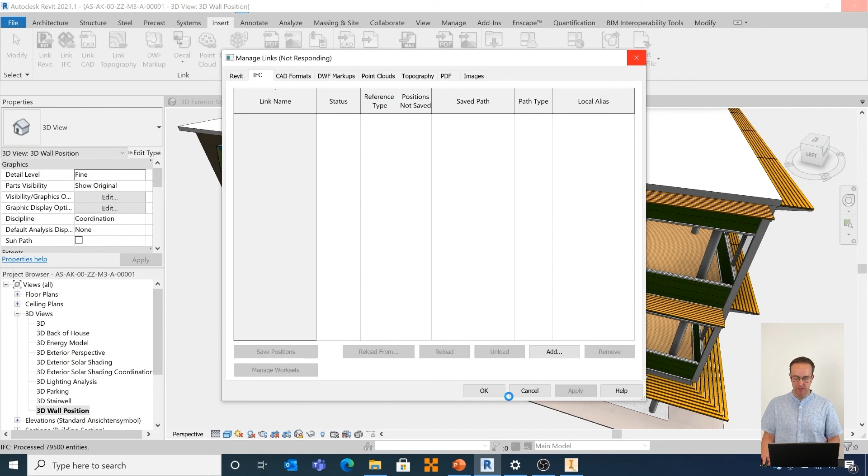Takes a couple of seconds to reference it, but then we will have live Inventor data inside of Autodesk Revit, giving you a round trip. If you imagine that demonstration, but controlled by Vault with a check-in and a check-out that's been synchronized directly with BIM 360, we've got something that works extremely well. So we have something that just does what you would expect it to do when you expect it to do it.

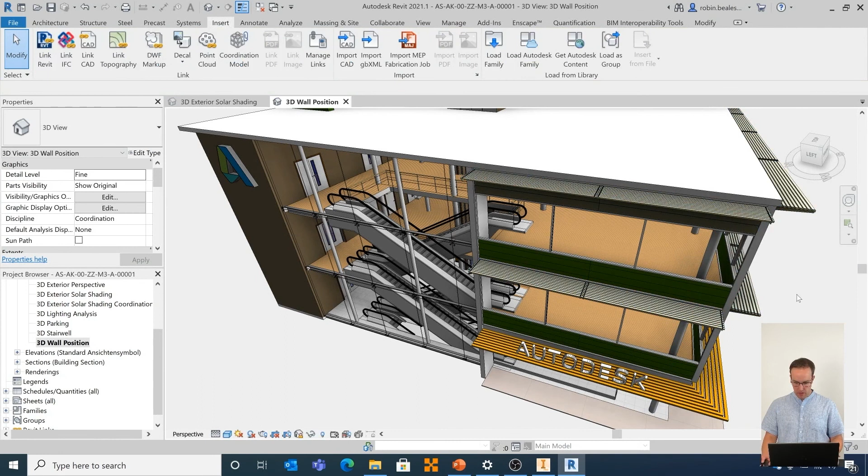So let me just come in here and select these facades and grab them all, hide them, and there we have our Inventor. Let's just unlock this view. Our Inventor design directly inside of Revit. Link that with other tools inside of your collection, such as Navisworks to do clash detection, and you've really got something that works extremely well.

And really for today, that's kind of all I wanted to show you. So I'm going to hand back over to Simon just to finish off this session with what that means in anger to you guys actually working on this stuff.

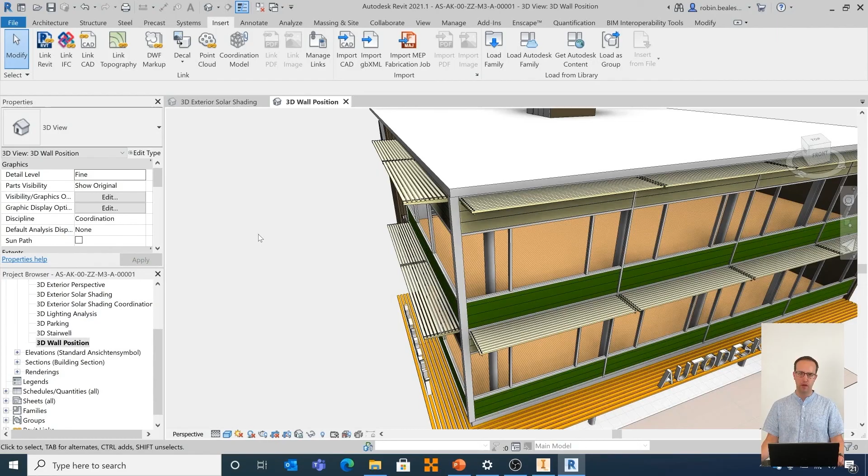Thank you, Robin. What an interesting presentation that was, and great to see some really new functionality coming into Inventor with the BIM workflows added there, especially the iCopy stuff. That was really interesting. Really great to see. Great to see that functionality coming in. Hopefully useful to a lot of you that have been watching.

It's quite clear to me that the world of BIM is quite complicated. There's a lot of things to go wrong, a lot of things to consider. Whether you're going to fully automate the program like Storm King, or whether it's a simple one-way transfer or a bi-directional link like Robin showed you with the iCopy. We're here to help. At Man and Machine, we've got a lot of experience in both the manufacturing and the architectural world, and we're here to sort of make that link. The worlds are definitely converging, and we're here to help you.